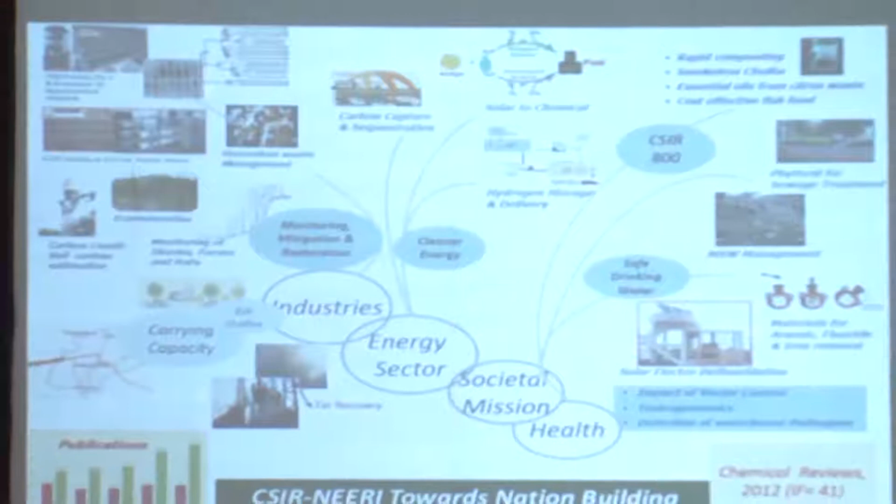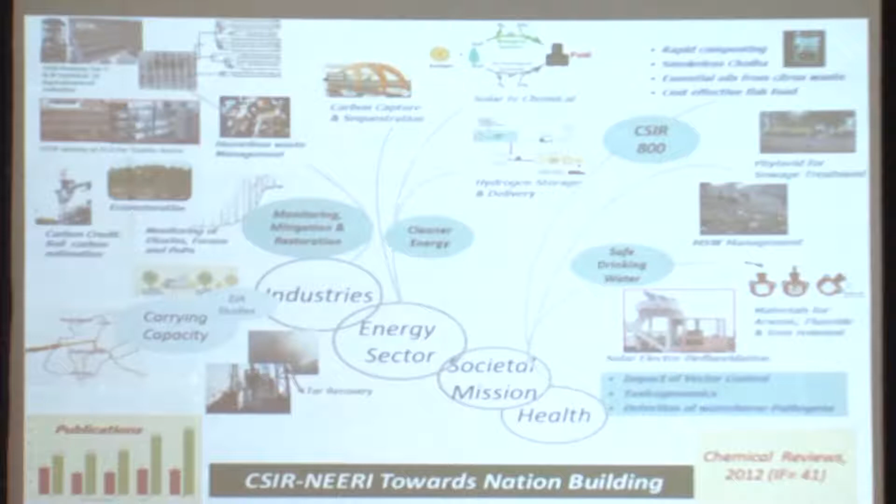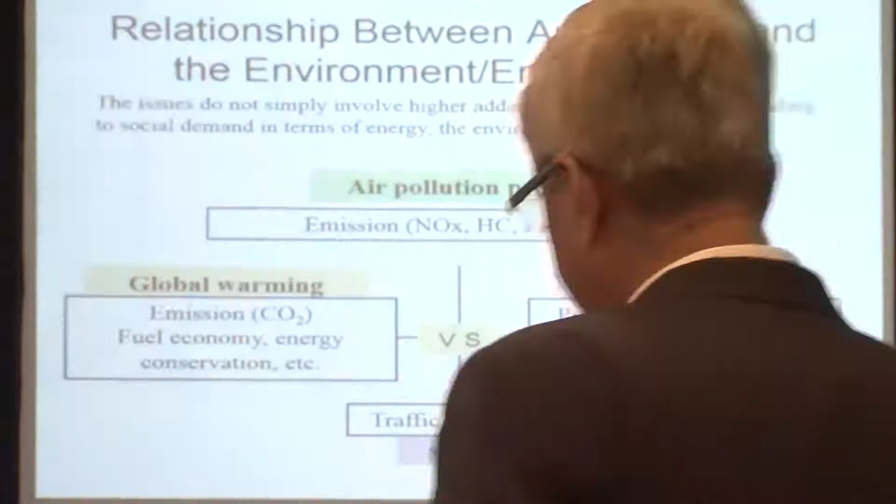As I said, we come from the Environmental Engineering and Management Research Institute, so we look at three issues as far as environment is concerned. One is the air pollution problem, which probably we talk too much about. Then comes global warming, CO2 emissions, and other environmental impacts.

Nowadays, we have a concept of life cycle assessment, so everything which is part of the automobile or related components should factor into waste disposal. And as you know, traffic accidents are also a big issue. So these are the overall relationships when we talk about the automobile.

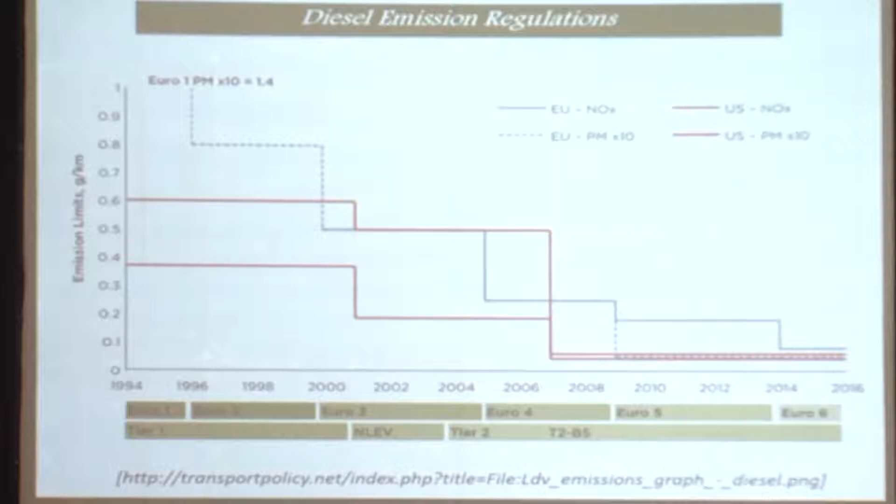I'm intentionally showing this because even after tightening so many emission norms, if you see the pollution scenario in our country, this is part of the CPCB 2011 report, which NEERI along with many other organizations was part of. The first graph shows Bangalore and the second is Delhi.

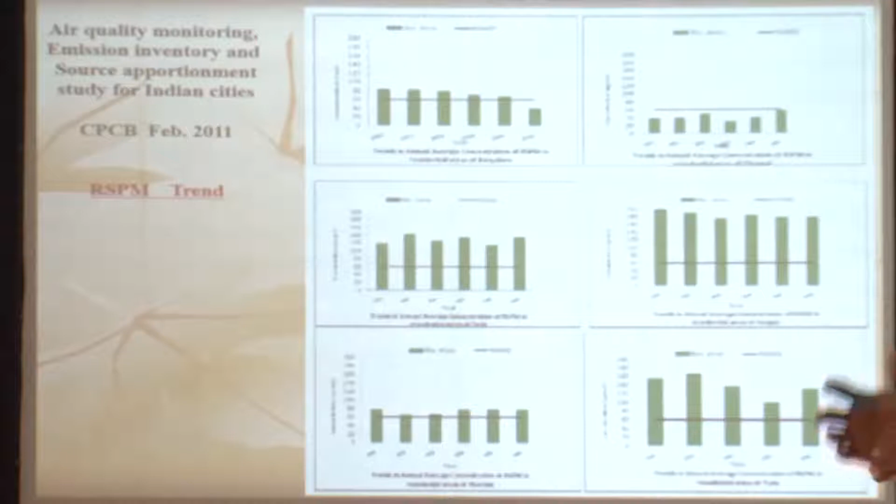That line is the emission, like the PM levels, RSPM level. So in most of the cities, we are exceeding the limit. Despite the fact that we have tightened the emission norms so badly, the present scenario is that PM levels are going up above the standards.

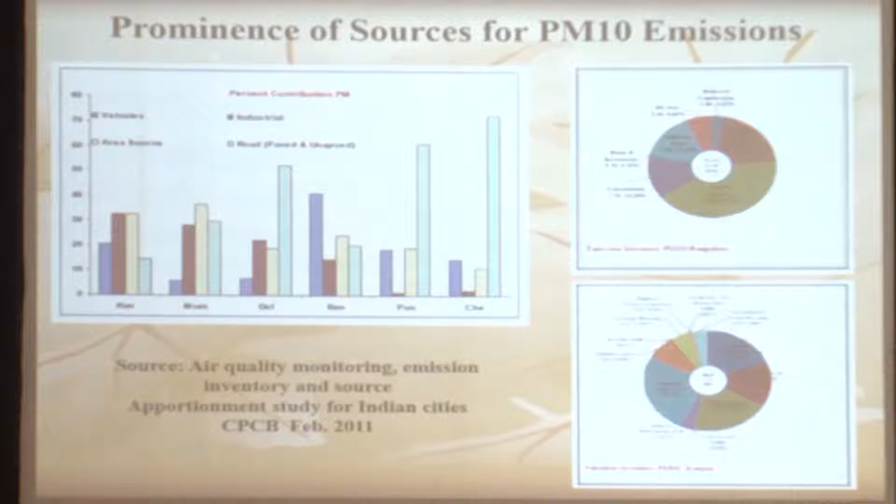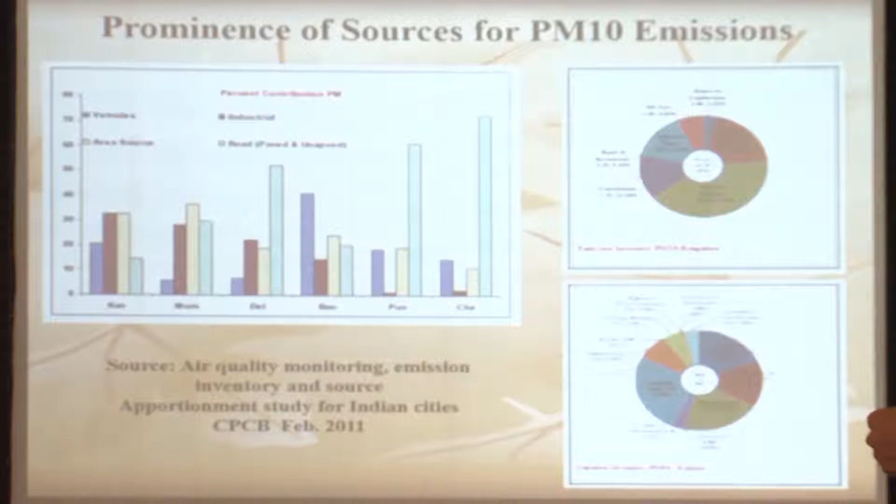If you see the source apportionment result of that particular study, which is now 5 years old, and new data is coming—I'm sure my friend Tarun will show some of that data—the source apportionment study really confirmed that in addition to road dust, which is one of the significant parts of PM emissions in India, diesel emissions are also significantly contributing. So two things are sure: diesel emissions are increasing, and the contribution of vehicles is also significant.

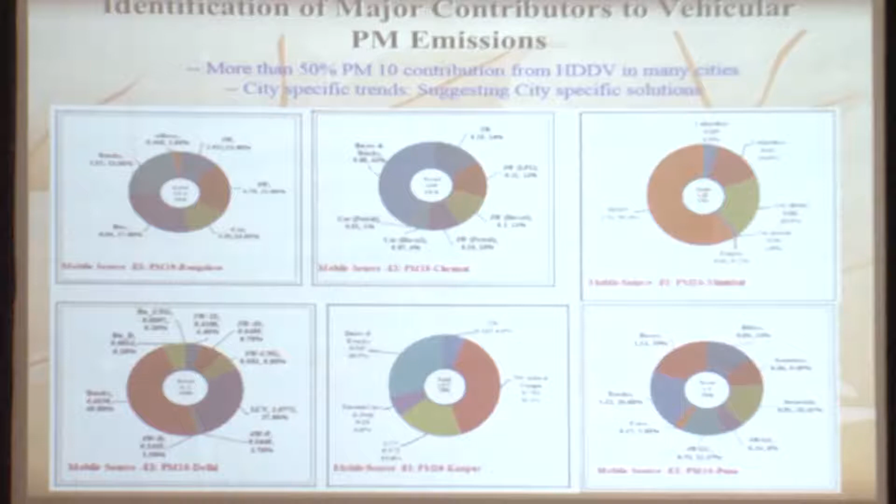If you narrow down to what kind of vehicle, this particular study suggests that around 50% of PM emissions are coming from heavy duty diesel vehicles. But that is a pretty city-specific trend. So heavy duty diesel vehicles contribute, but it's city specific—for example, in Bangalore it's probably more significant.

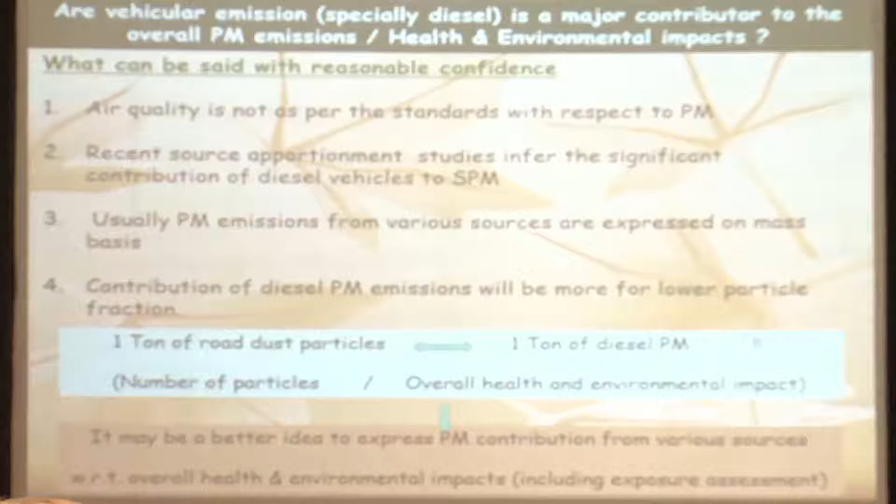I would go one step further—based on this study and all previous studies, and I try to project this wherever I find opportunity—that we are talking here in terms of the mass of particulate matter. But can we really compare 1 ton of road dust particle and 1 ton of diesel PM, as we do at NEERI and many other environmental engineering institutes?

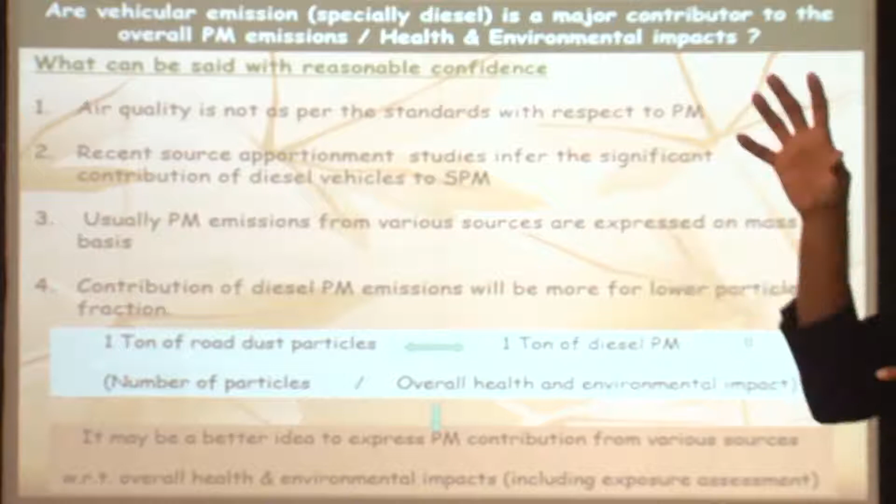Nowadays we talk not about emission-based targets, but health-based targets. So if you see the projection, and when you go to anybody like a minister or bureaucrat, they say the major issue is road dust, because the road dust contribution is pretty high.

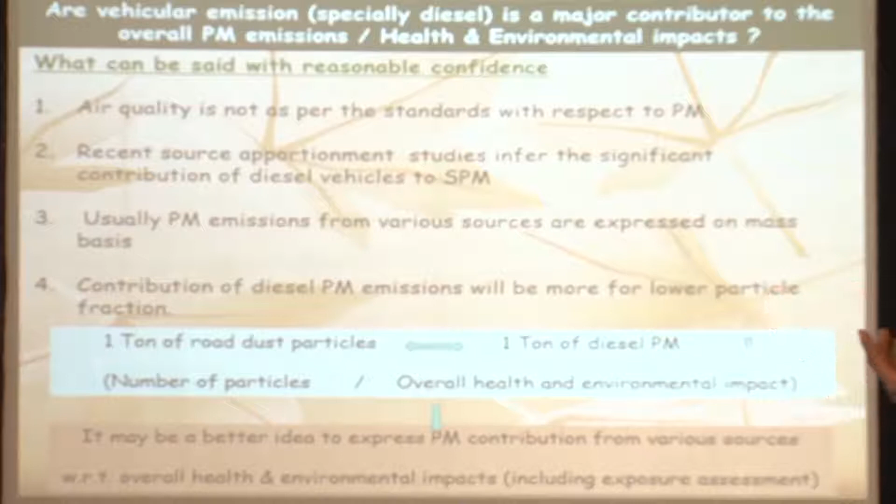But can you really compare the 1 ton of road dust with the health impact of 1 ton of diesel particulate emission? It's high time we should start projecting the overall health impact of diesel emissions. Sometimes its contribution in terms of mass or weight basis may be 10%, but the health issue could be quite up, in fact the diesel emissions quite up.

And there are beautiful posters I can show, we have seen this one. Oh, sorry. And where's the pointer? This one? Oh, I'll use only this.

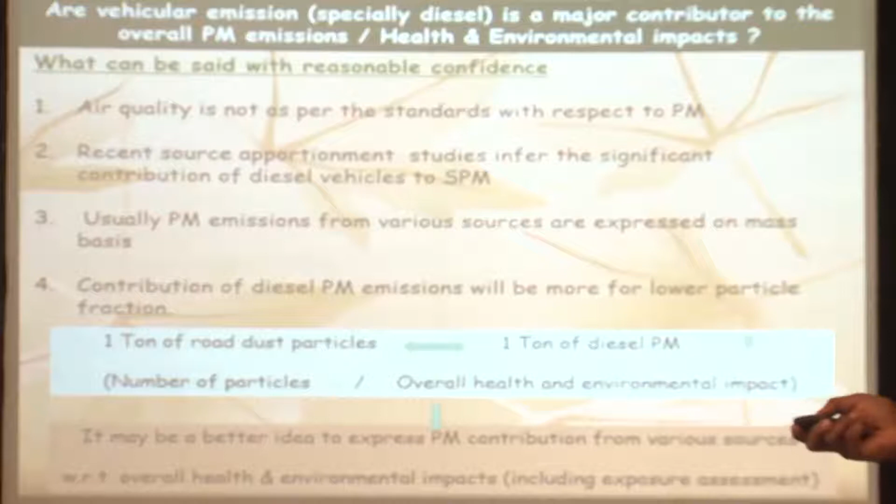Thank you so much. So this is one thing which led us to believe that in many cities the contribution of diesel particulates in terms of mass emissions is less, but if you see the health impacts, it will be much more severe.

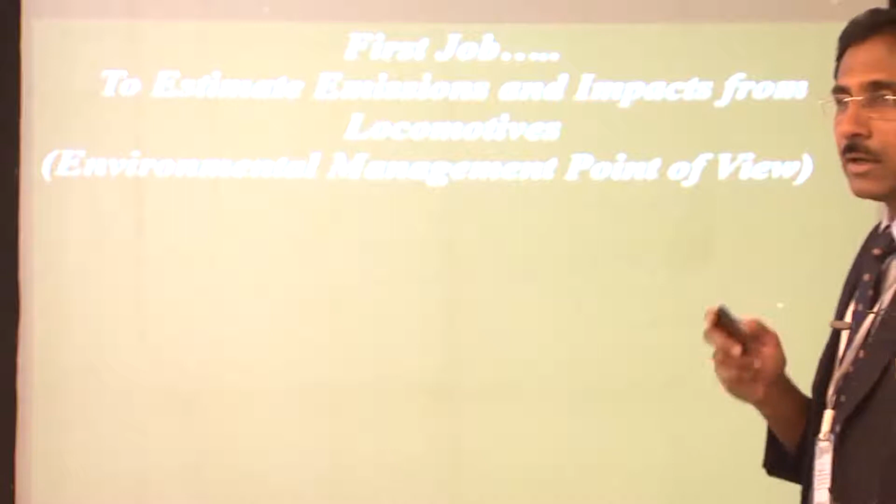So what is our first job as far as locomotive emissions in this country are concerned? To estimate emissions and impacts from locomotives. Professor Avinash Agarwal made a beautiful presentation during the last ECT showing they are already on the job. This is very much required from an environmental management point of view, because we are still a developing country where every rupee counts, and we cannot project one issue and hype about it, because we have more burning problems related to food, poverty and health issues.

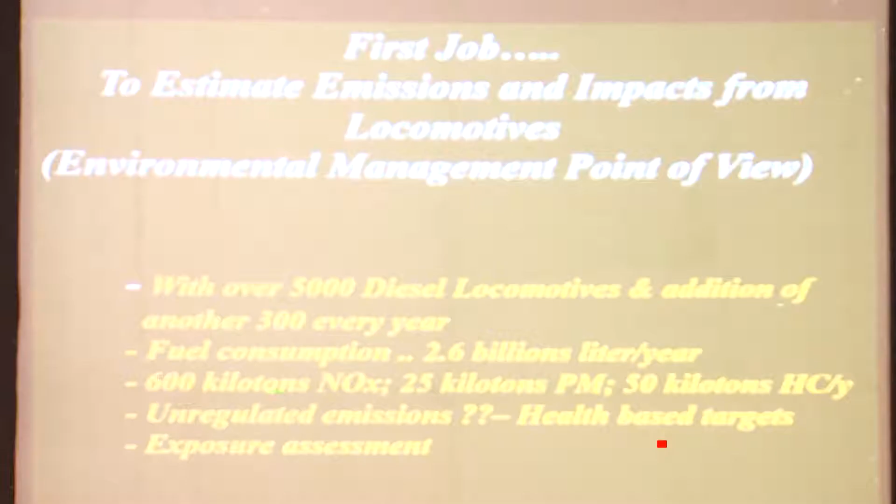With over 5,000 diesel locomotives, probably this number is less, it's about 6,000 plus, with an addition of another 300 every year. The fuel consumption is enormous, 2.6 billion per year. I had taken roughly 25 kilotons PM, and nowadays it's possible to estimate the social cost or impacts of this.

Let us see what are the strategies for vehicular emission control, because this is quite similar, and we should learn lessons from the vehicular emission control program, which has completed almost 20 years in this country.

So engine technology, I'm sure there were many good deliberations. Revision of emission norms, introduction of emission norms are rather on the cards. Adoption of vehicle pollution control technology, this is how we go. I've intentionally made it red because proper implementation has been a problem, and today even a problem.

But when it comes to the locomotive, we can have better control. As far as I&M is concerned, this country is probably suffering most because of the lack of inspection and maintenance. We can have better control when it comes to the locomotive.

Traffic planning and management is another issue, and the majority of emissions in the metro cities, or for that matter even in Lucknow, comes from this. This is probably no issue when it comes to the locomotive.

Improved fuel quality, so I was told that they are using commercial diesel, which is of decent quality now. Inspection and maintenance of emission control equipment, again we can have better control, because if I ask you what happened to the first catalytic converter fitted on the Indian car, nobody knows.

It is still there, maybe completely blocked, because the converter we removed in Nagpur, I found more than 50% of the converter should contribute more to the emissions, because we found the ceramic support partially damaged even. So this is the state.

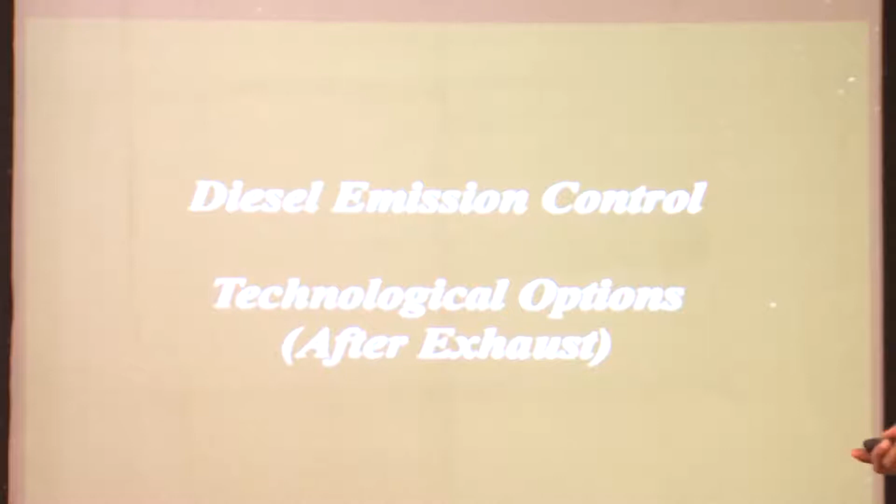Now I'll briefly introduce, because we have got an expert from Sud-Chemie, and briefly this was discussed. This is the scenario of diesel emissions and what are the technological options. I'll restrict to the after-exhaust treatment, because engine is neither my area and it has already been discussed very much.

This is how the diesel particulate forms, and during its cooling process two things happen, one good and one bad. The better part is it gets agglomerated and the size increases so that its penetration or inhalation is restricted. But the bad part is most of the hydrocarbon starts getting adsorbed on that, which actually offers the carcinogenicity or the more harmful health impacts.

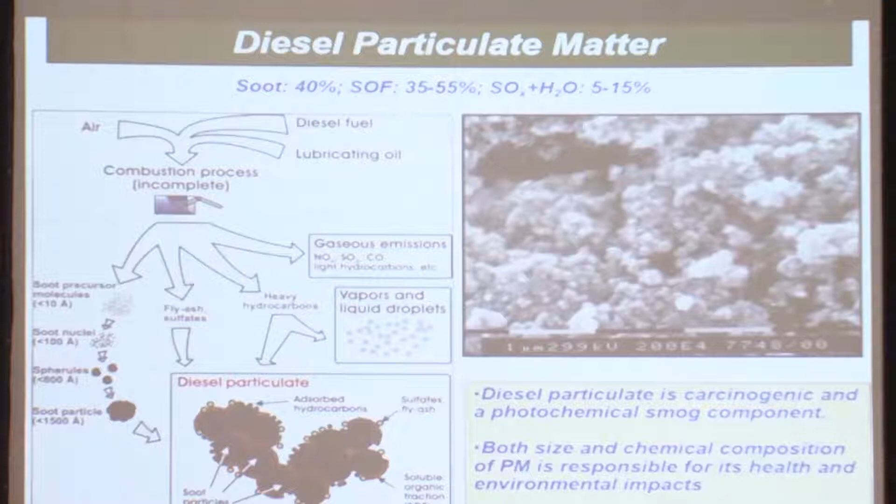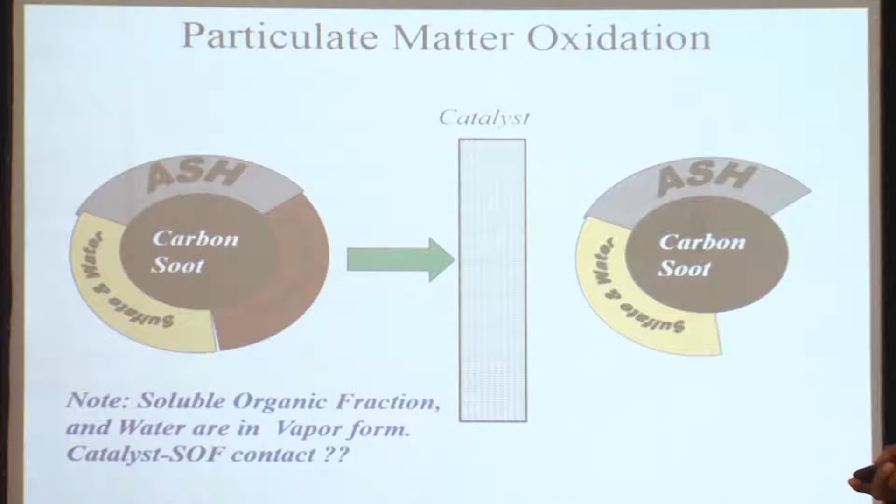Three options are quite popular as far as vehicles are concerned. The very first is a diesel oxidation catalyst, where we treat what is known as the soluble organic fraction. It's quite similar to the petrol-based catalytic converter, and we can expect oxidation of hydrocarbons associated with the soot particles or with the particulate matter. Sometimes the exothermic heat generated out of this oxidation may also contribute to some extent to oxidation of carbon. This device is quite simple, and this is the typical particulate matter.

Here you have coated the catalyst, and what we are losing is a soluble organic fraction. If you have more fraction, then the efficiency is more.

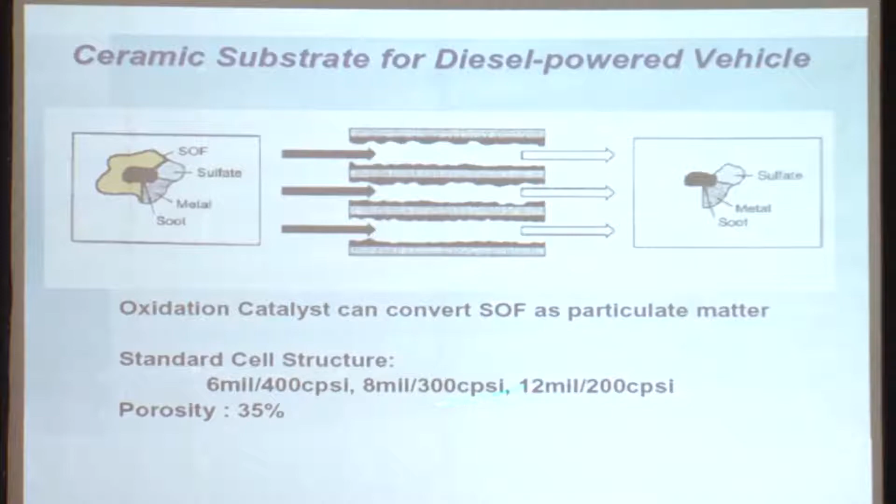Typically, DOC gives 20 to 30% efficiency, a moderate efficiency, but it requires relatively less maintenance. Most vehicles in India are using DOCs and not DPF.

The second device, which is most efficient, is the diesel particulate filter. Now they say for Euro 5, we may need DPF. For filtering particles, obviously a filter is the most efficient device, and commercial filters are available with very high efficiency.

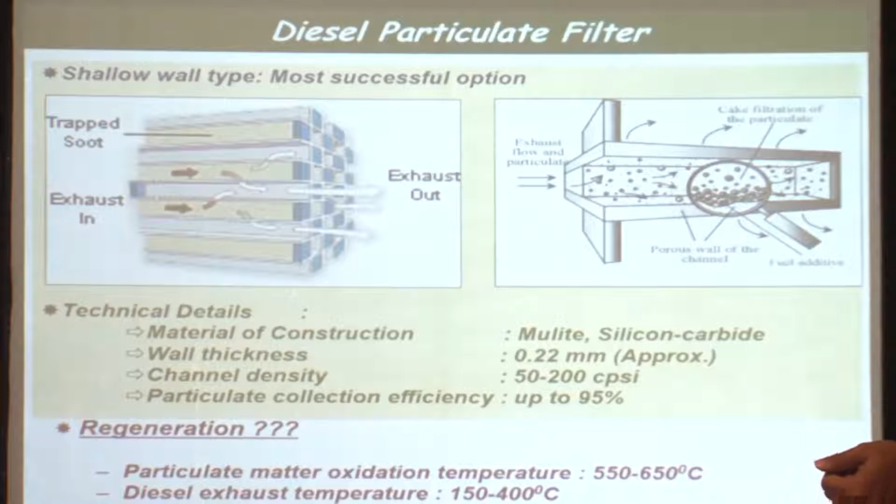But the issue is, after it gets clogged with soot, how to regenerate it. Because it burns at about 550 to 650 degrees Celsius, while diesel, being a lean burn engine, has a quite low exhaust temperature. So regeneration of DPF is the major challenge, and there are two major approaches.

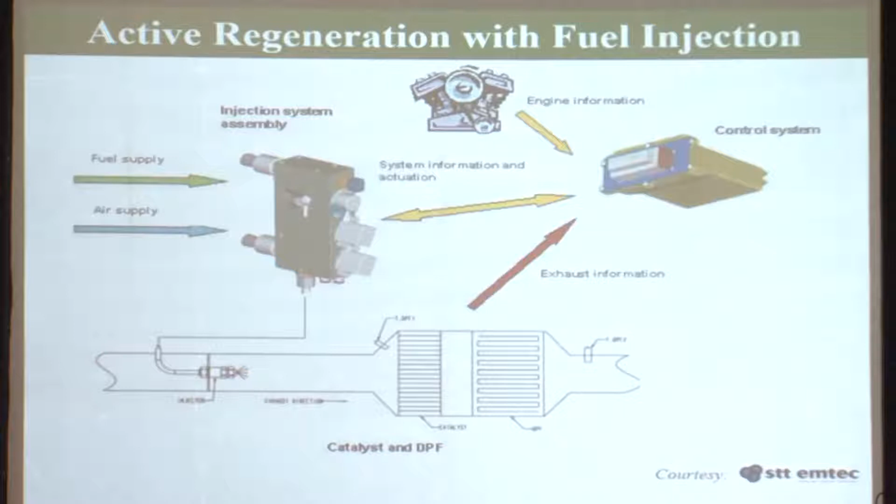One is active regeneration with fuel injection. This may be a possibility with the locomotive also, because it's a huge engine, and there's some scope for this, but certainly there will be a fuel penalty which we should take care of.

Then second is catalyst assisted, or CRT, from Johnson Matthey, discussed in the last session. There is a DOC whose job is to oxidize NO into NO2, and this NO2 then reacts with the trapped particles to regenerate it. These are most commonly used for vehicles.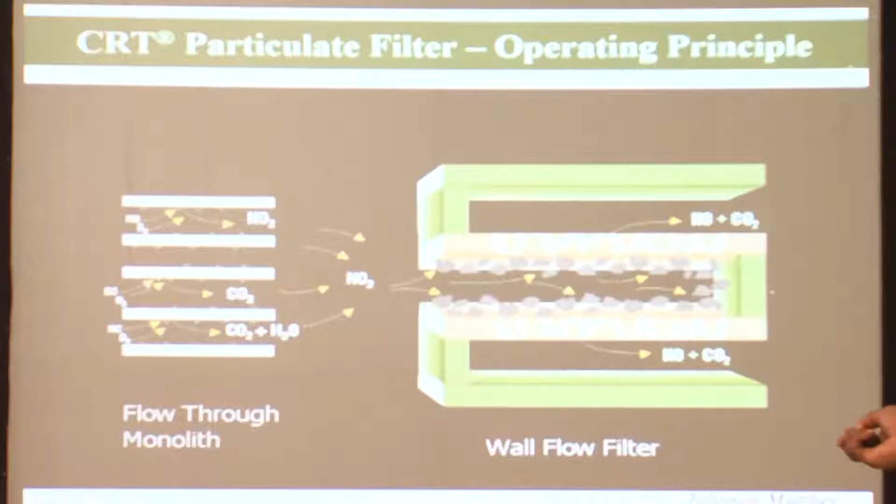In between come the partial flow filters, because DOC generally doesn't have a back pressure, and the DPF has a high back pressure. This compensates for both, and there's been really good development during the last decade, achieving moderate to high efficiency. So we have 3 devices, 3 different kinds of efficiency, 3 different kinds of maintenance.

This partial filter technology, again, I have taken from Johnson Matthey. So this is the background: we have diesel emissions from vehicles which are significant, and we have certain estimates about what kind of emissions are there from locomotives.

There are 3 options which we tried on vehicles. I certainly don't have any experience on locomotives. So what are the R&D opportunities? Where do we stand, or where do we work?

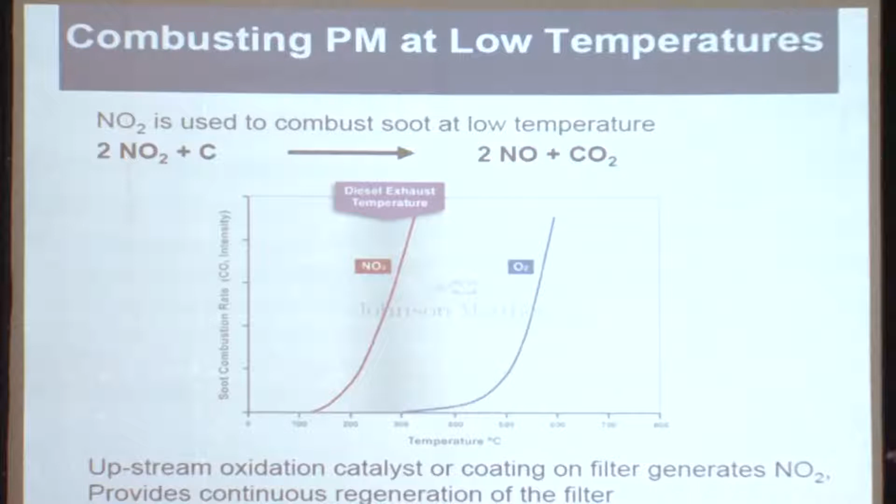This is a typical reaction for soot oxidation. NO2 plus carbon has a favorable delta G, what we call in chemistry or thermodynamics, and this reaction can happen at as low as 200 or 250 degrees Celsius, although 300 or 350 is more desired. But dependency on NOx is one issue, and second, most of these reactions are catalyzed by noble metals.

So the first driving force: can we catalyze a reaction without NOx? Can we have a reaction of soot plus oxygen that regenerates? And the second driving force is that it's all noble metals.

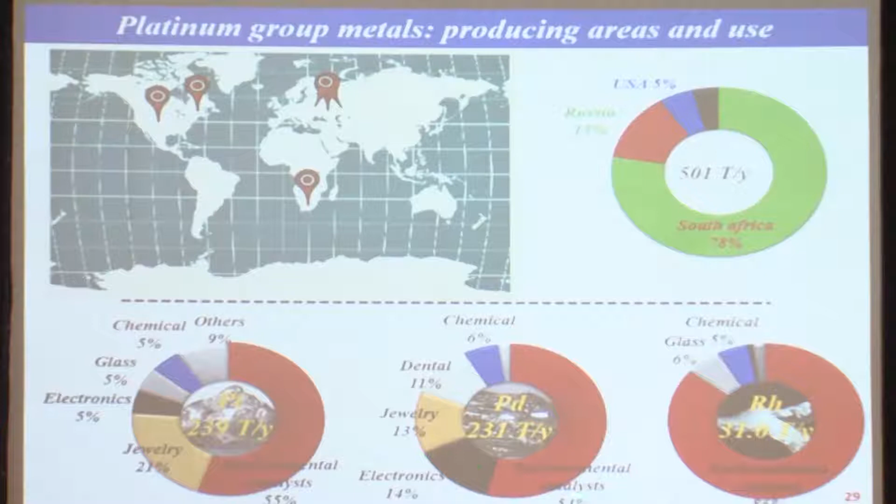This is the consumption: about 55% of platinum, again 55% of palladium, and 90% of rhodium are being consumed only in environmental catalysts. So there is a good possibility to explore non-noble metal based catalysts, but the application is very, very tough. We have been working on this for more than a decade.

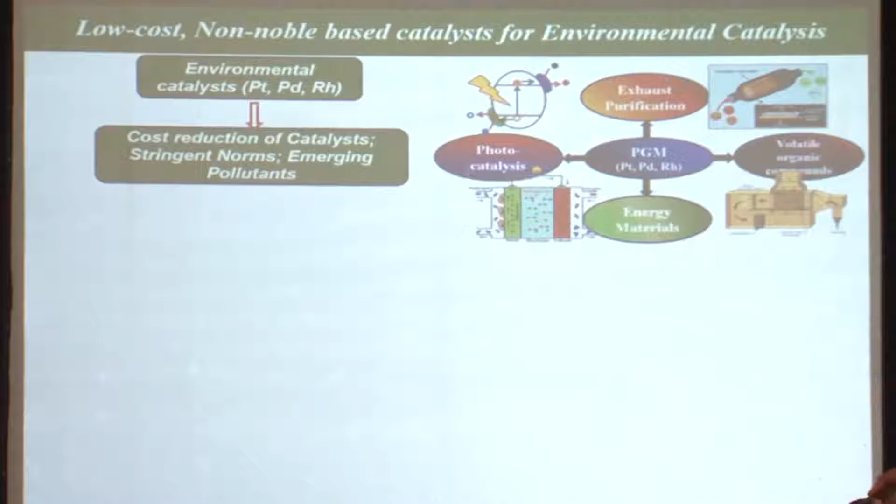So we have 2 approaches. One is to reduce the amount of noble metal, but people have already hit the limit, and once you change the particle size, the chemistry itself changes. But one of my postdocs wants to work on this.

And second, the possibility of non-noble metal-based catalysts. The only driving force is that we're now getting a cleaner fuel. The stability is not so good, but with the introduction of ultra-low sulfur diesel and so on, this is how we are working.

So we are starting with milder applications like VOCs and other applications, not really auto exhaust. But this is one approach where we are working.

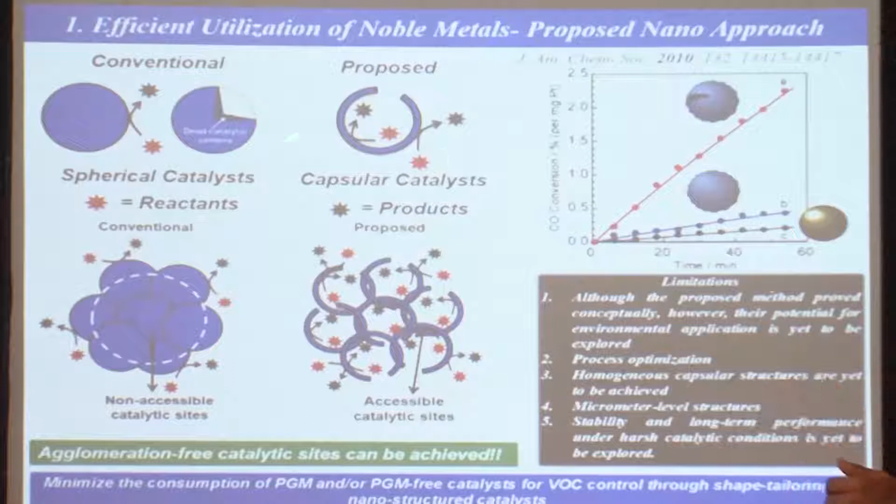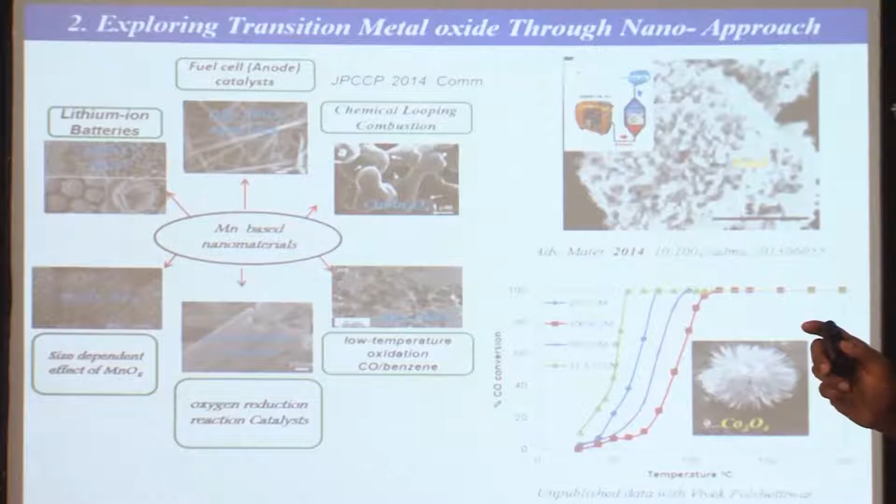The second approach is we are exploring quite a few catalysts which either don't contain or contain a very small amount of noble metal, with the entire emphasis on reducing the cost of materials. I'm not going to go into the details for two reasons: it's not a chemistry-based audience, and second, time constraints.

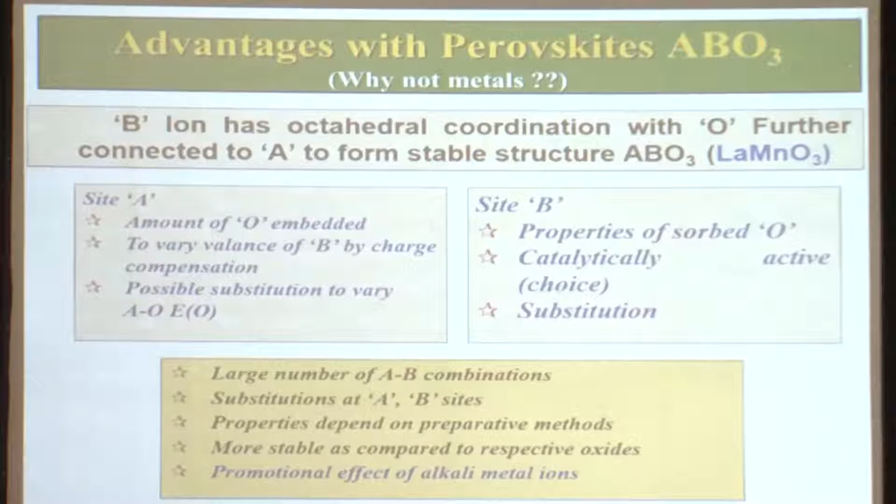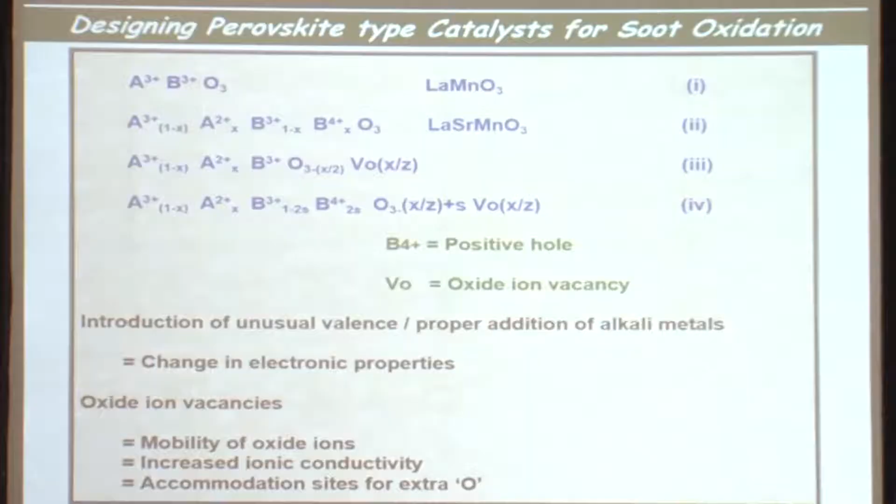This is one class of compounds we have been exploring along with a couple of our collaborators, where we exploit the knowledge of chemistry to design different catalysts. These are some of the catalyst compositions we recently explored and found interesting for diesel soot oxidation.

When it comes to the laboratory-based catalyst evaluation system, we use two kinds of systems. One is a thermogravimetric measurement, where you put the soot and it gasifies and you get the weight loss. Next you mix the soot with the catalyst and check the temperature.

But probably the more realistic evaluations you can do with this kind of setup, where you create a simulated automobile exhaust composition, and then you have a reactor where you can manipulate the temperature, and a gas chromatograph and NOx analyzer give a fairly good control over what is happening at what temperature. So we like this kind of assembly very much, and this is the kind of data we get.

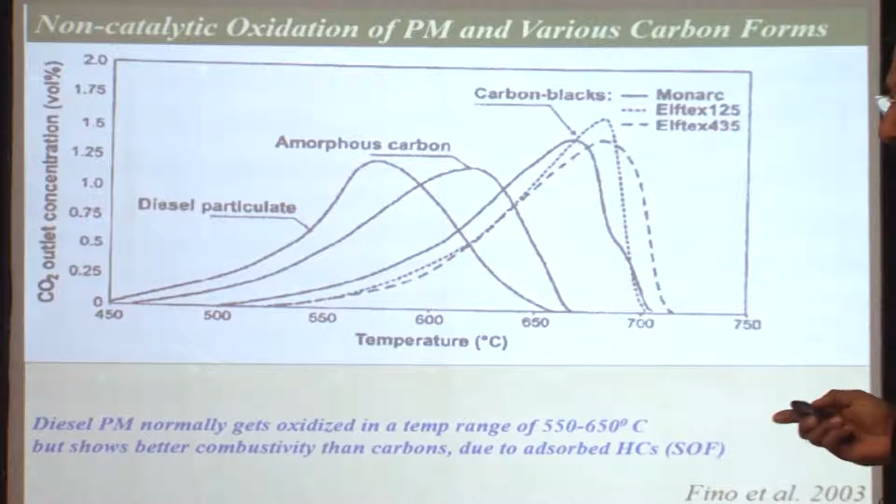For example, if you burn the soot, it will give you CO2 at a certain temperature. With catalyst, this should reduce, but you can see with bare soot it also varies a lot. These are reports from the academic world showing that it depends on the soot composition. After catalyst intervention, you can get a peak at around 350 or 400 degrees Celsius instead of say 600 degrees Celsius. That gives us some idea about the catalytic activity.

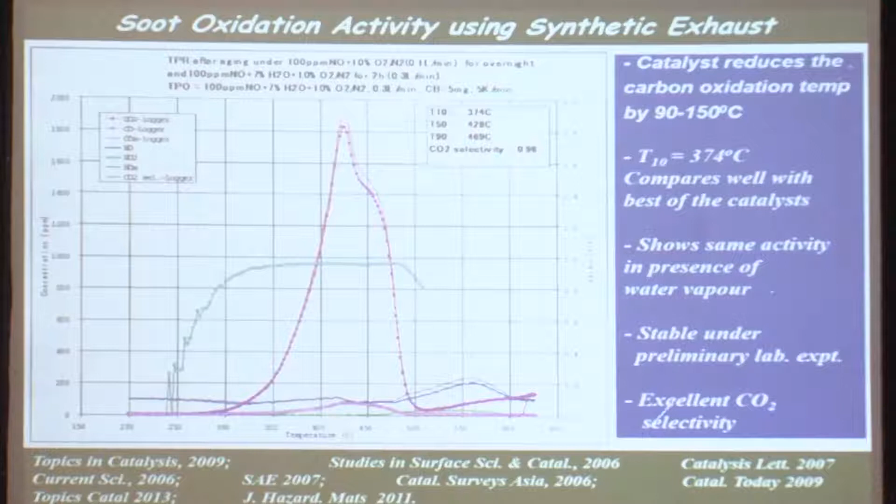So normally the academic world uses these kinds of methods, and then the next job for us is to go for the full scale prototype, which is fairly complicated. I collaborate with a Japanese university, where they have a bench scale facility with a 200 cc prototype and a diesel engine, so you can have an exhaust flow and much better control over things compared to the lab setup.

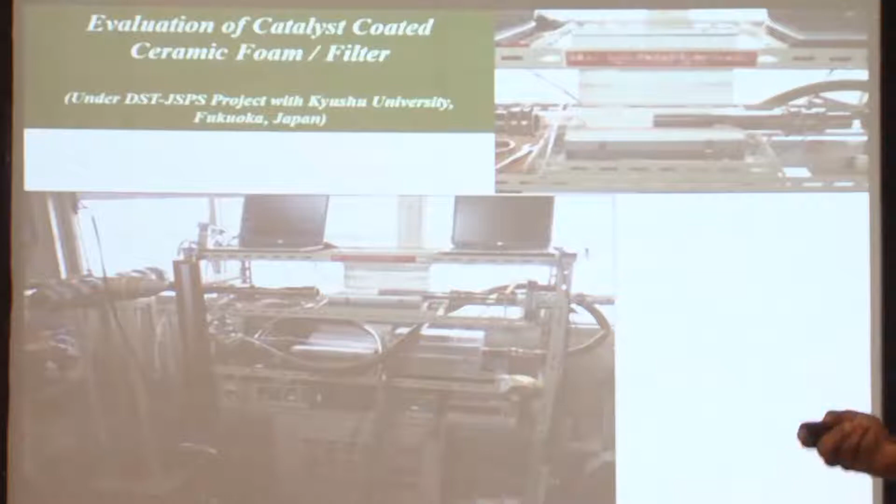The last stage, I would say, for R&D is the evaluation of the prototype. Here we collaborate extensively with Professor Avinash Agarwal and Professor Tarun Gupta at IIT Kanpur. It's an amazing facility they have. Recently our students prepared some prototypes using purely non-noble metal-based compounds.

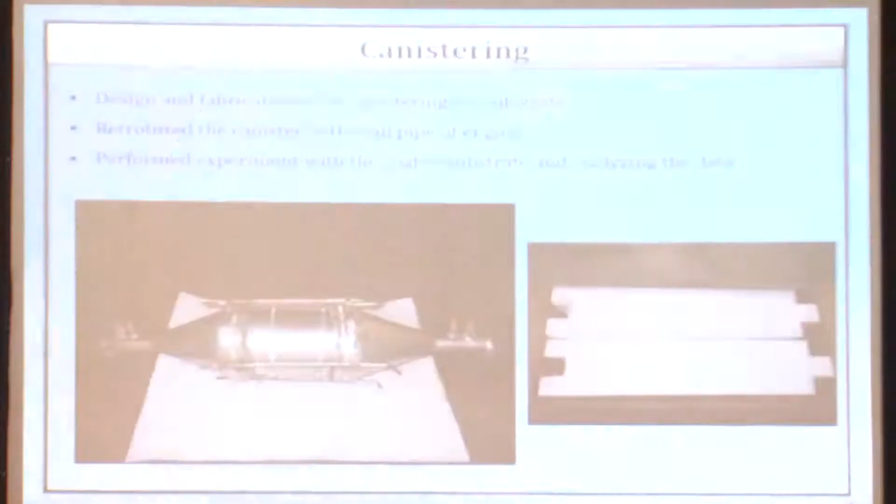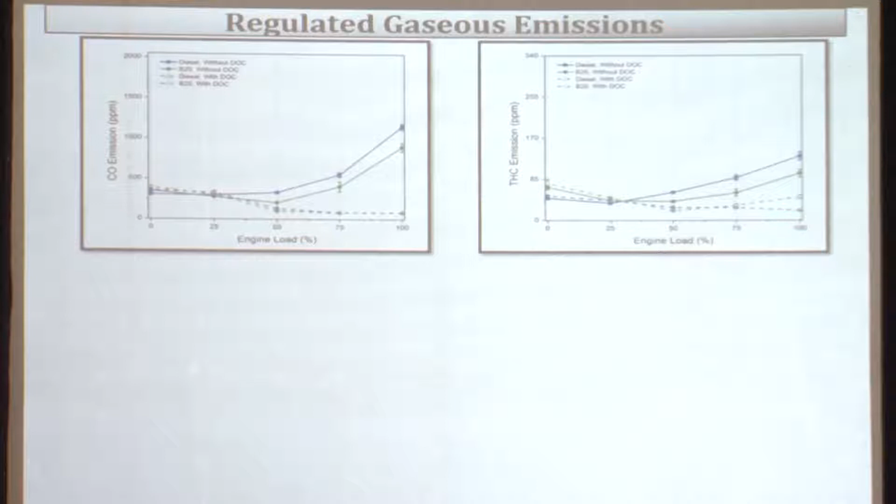This is the data. There were two interests: my interest was to evaluate the catalyst, while Professor Avinash's interest was to use the B20 or biodiesel blend. We found that diesel with the DOC and B20 with DOC, as far as CO emissions and THC emissions are concerned, showed significant reduction. The temperature was also fairly acceptable, 200 degrees Celsius for CO in both cases.

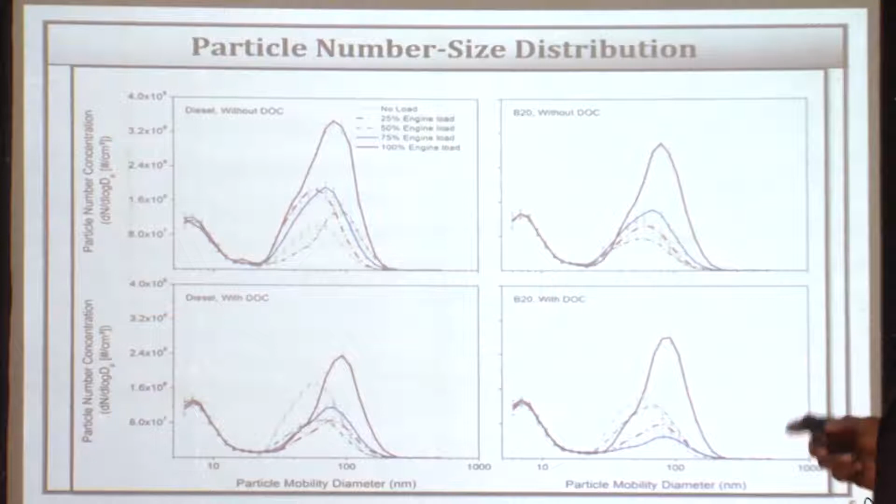So for CO and HC we got decent data, and some reduction in particles too. On the particle number side, they have good facilities, so this is the particle number size distribution with different load conditions. I would say a DOC is anyway not expected to give very high efficiency, so in this particular case we could get, in some cases, 20 to 30% reduction in PM as well. There's quite a bit of data, but I have to move on.

I'm showing this particularly because as far as I see, there are 6,000 locomotive engines, and we are adding just 300 every year which are supposed to be cleaner than the engines we already have in use. So the majority of emissions come from these old or dirty engines. We need to seriously think about that, and a few studies worldwide show that retrofitment could be an option. We have done some retrofitment studies with respect to city buses, the old city buses, and probably that could be useful. I'm not very sure. As far as city buses are concerned, they are also one of the main targets because the city bus roams around inside the city, and its impact is more than intercity buses.

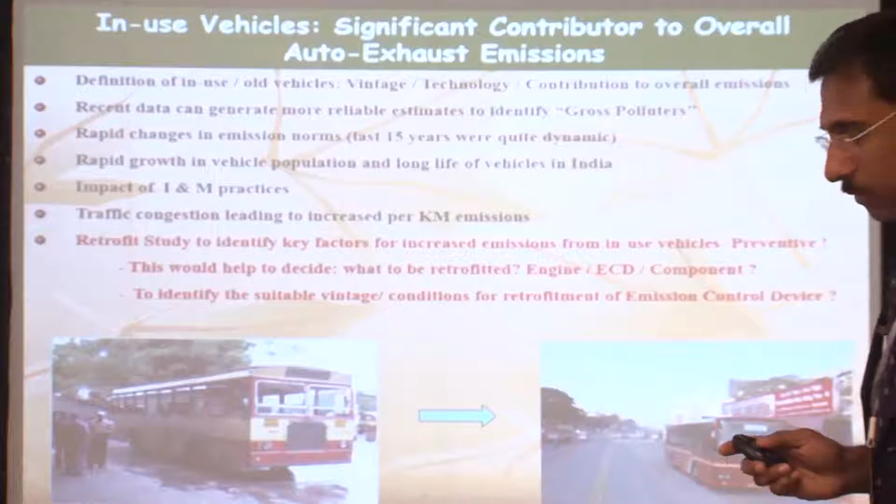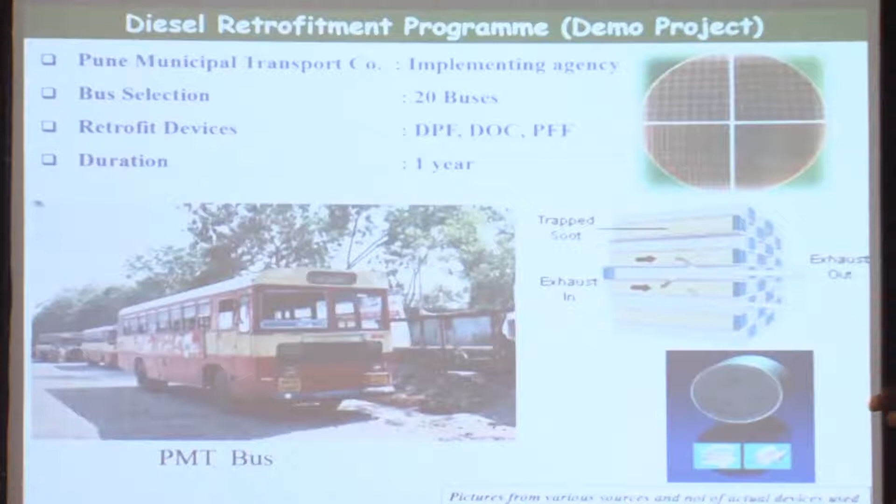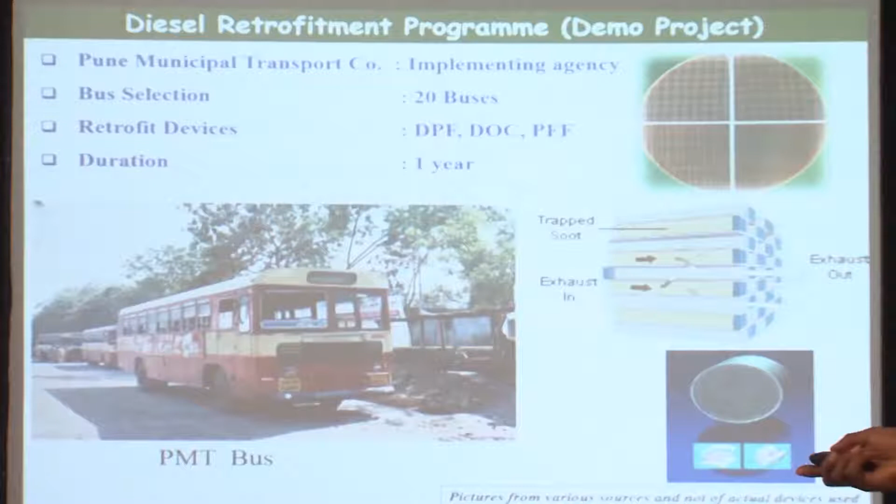There was a US EPA sponsored project in Pune where we attempted this, with three devices: DPF, DOC, and a partial flow filter, what I showed you. This was a typical bus. We selected 20 buses, and to some extent we were forced to try DPF even though there was no experience whatsoever, even on the new buses at that time.

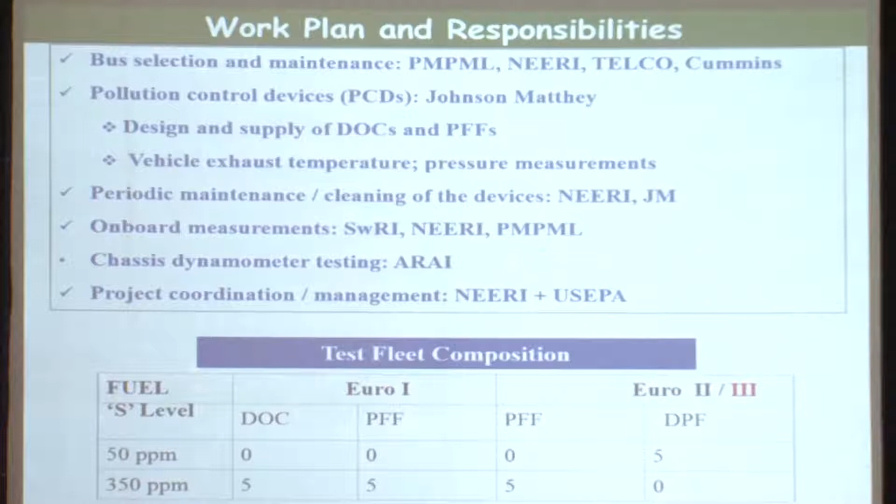This was our matrix. Fortunately, quite a few institutions were involved. Our technical partners were Johnson Matthey and Southwest Research Institute of USA. PMPML is the bus agency, in fact, and ARAI was responsible for other things like testing.

One issue we faced: the time that you fix a device and something happens while the bus is running, then there is big public unrest. So you need to take care of those things. So what we have done, we have put a sort of CRTDM sensor. It gives a signal to the driver, and then we made a kind of bypass. If the bus stops, what to do? We have to accommodate maybe 100 passengers in a bus. So you can bypass automatically.

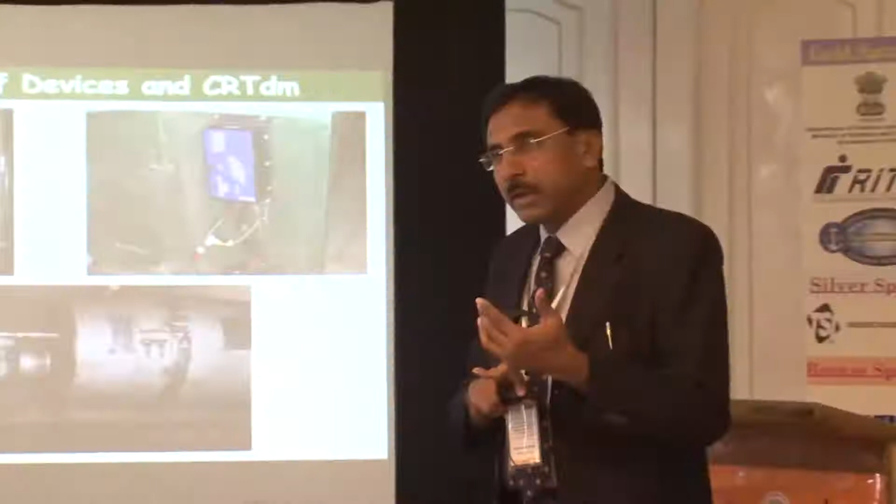So these kinds of preventions you have to take, and before that goes an enormous amount of preparation, to start with the cleaning of the fuel tank and the maintenance of buses. To tell you, the fuel tank was containing not less than 80 or 100 kg of sludge. That was the kind of sludge we found in the fuel tank. So please be careful before you start blaming the technology provider like Johnson Matthey that your device is not working. There could be tens or maybe hundreds of other reasons. It's a tough job, we found.

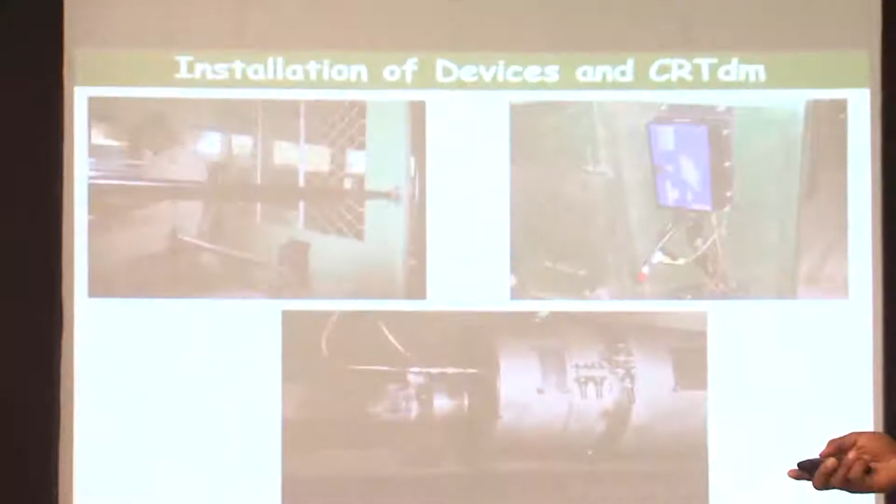And the buses that were given to us were maintained, I would say, in terms of fuel efficiency, because that is the interest of the corporation. But in terms of emissions, it was hard. We used to take periodic emissions, and one very interesting exercise we did with SWRI was to get on-road experience.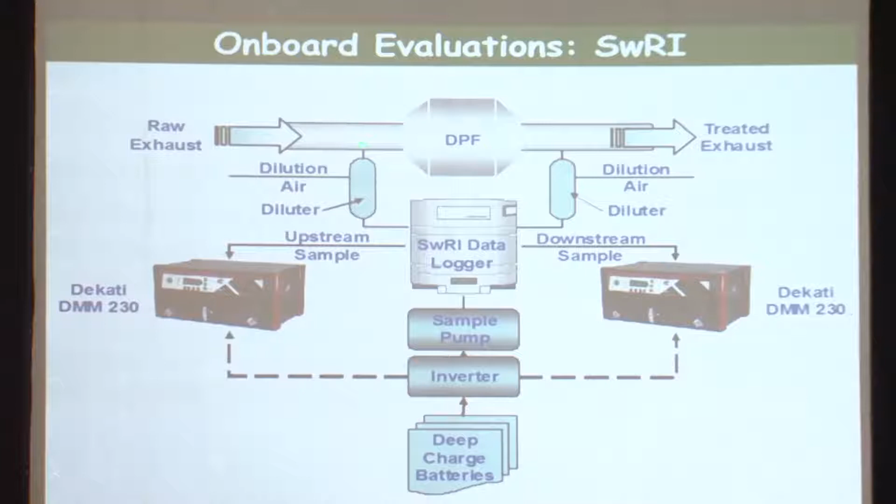There has been a lot of good or bad news we must have heard during the last couple of months, in fact, from very leading automobile manufacturers about cycle beating and other things, and people are calling it a huge scam. And we had some experience that we were not getting that. SWRI helped us do some onboard trials. For that, we hired two PM analyzers, and we fixed one analyzer before the device and one after the device. And we did a lot of complicated preparation.

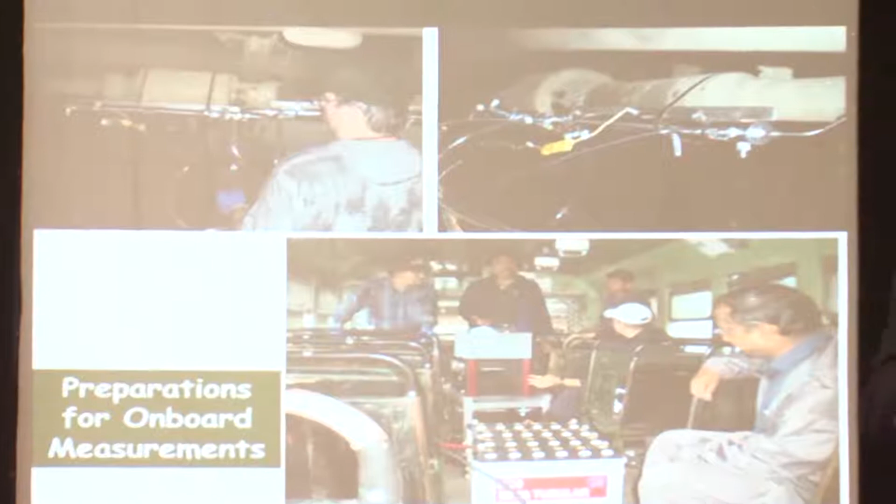So you have a bus, and inside the bus you can mount all the equipment. You can put some sandbags to simulate the passengers, and then you can take the emissions right from before the DPF and after the DPF, and you run the bus. We followed one typical pattern of a city bus, typical speed and everything, and that gave us some interesting data with respect to the exhaust temperature, the emissions, and other problems you might face.

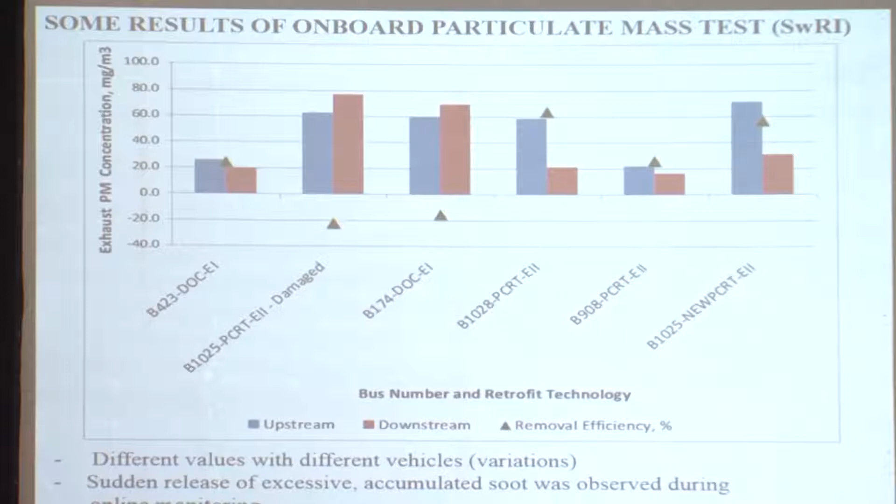The efficiency was ranging in a very, very wide range, I would say, sometimes plus 60 or plus 70 to even minus 20, which could be because of blow-by, that some emissions were trapped and then there was a blow-by. Exhaust temperature in general we found was very, very low. That was the major challenge, in fact, because the city bus can hardly pick up any speed. But I don't see that problem in the locomotive, so there are going to be some advantages.

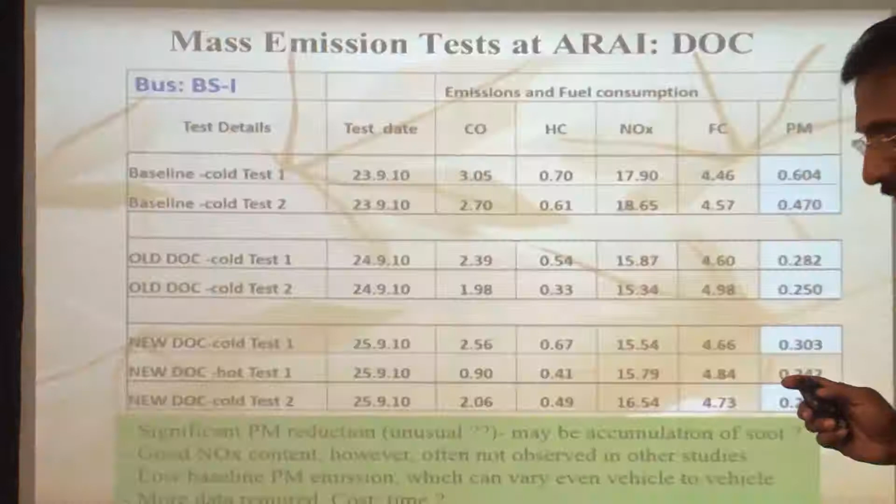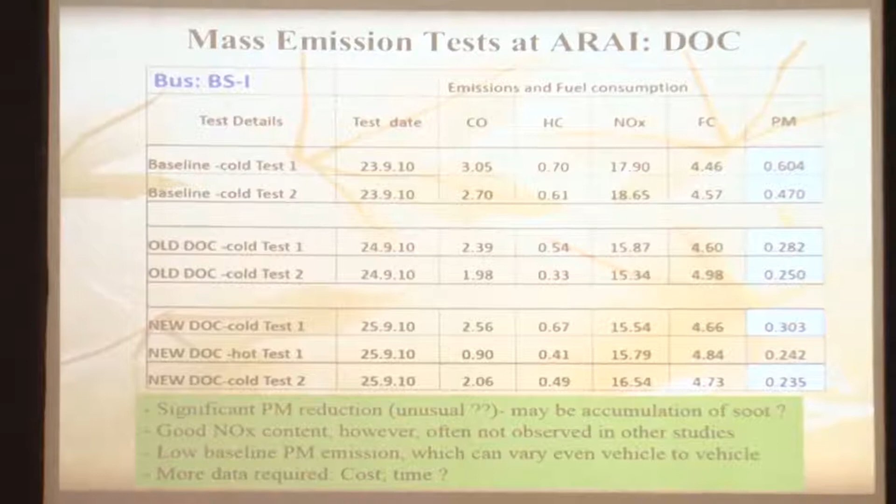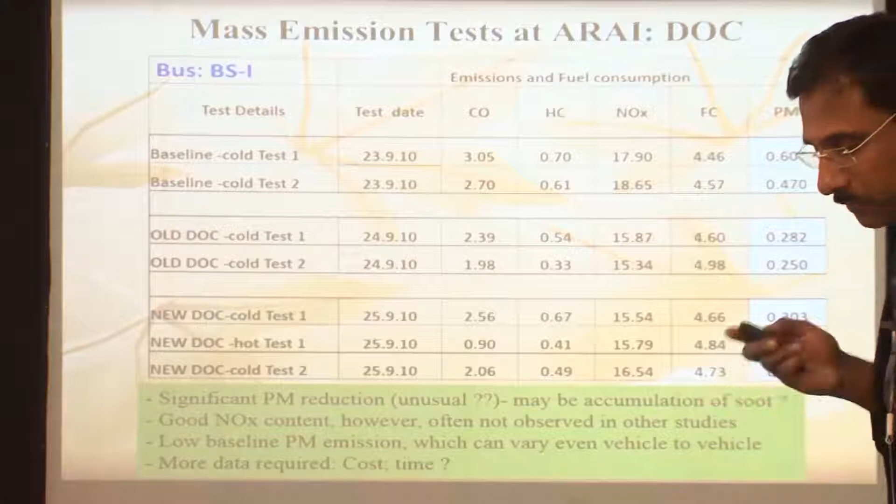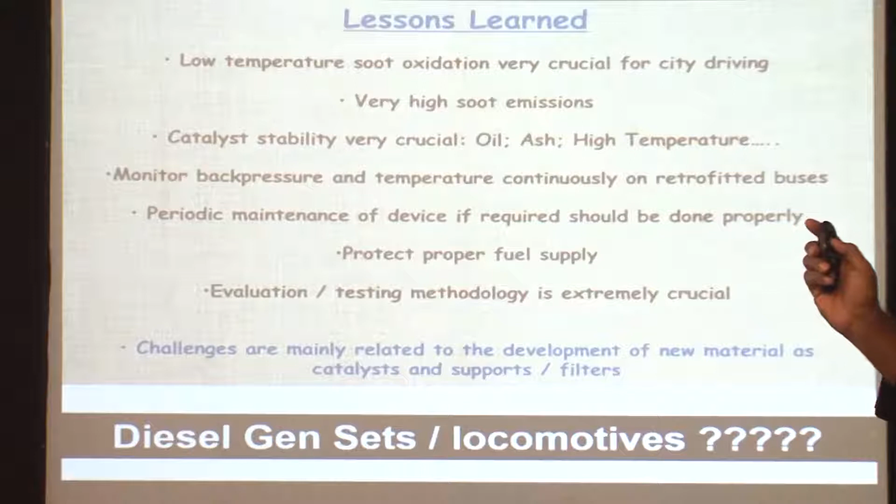So I would move to my final slides. This is the experience we have, but if you compare this experience with the locomotives, what I understand is that there could be some advantages: they are limited in number, we call it 7,000, while Delhi has more than 9 million vehicles. So controlling 7,000 is not a big deal. Better inspection and maintenance, because technical support is well in place. Engine vibration I am not aware of, but the track-related vibrations are not much as compared to the buses.

Something between mobile and stationary sources. Whenever some problem comes to us, we love the stationary sources, and we don't like the mobile sources because they are plenty in number and there is no control. That's why I personally feel that a diesel genset is a better option than the diesel vehicle, because there are hundreds of issues. User intervention is minimum, skilled user.

In Nagpur, I don't want to name the company, but a two-wheeler, very recognized multinational company. When you send your two-wheeler for regular checkup or servicing, they offer you some kind of cleaning or putting some liquid on the catalytic converter. And without knowing this background, they were forcing me to go for that thing.

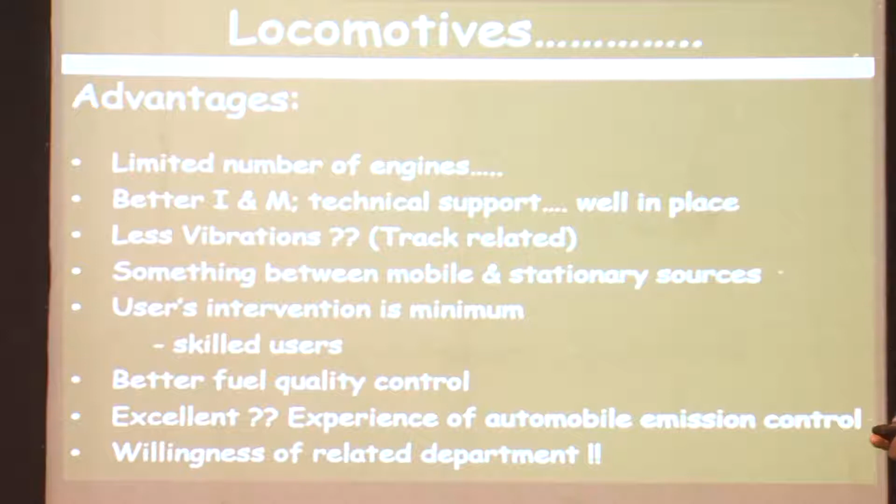So in this particular case, probably we'll have better control, better fuel quality control, and we have a lot of experience. I put question marks on excellent because initially we have learned quite a few things, mistakes I would consider, and we should not repeat those. And there is already a willingness.

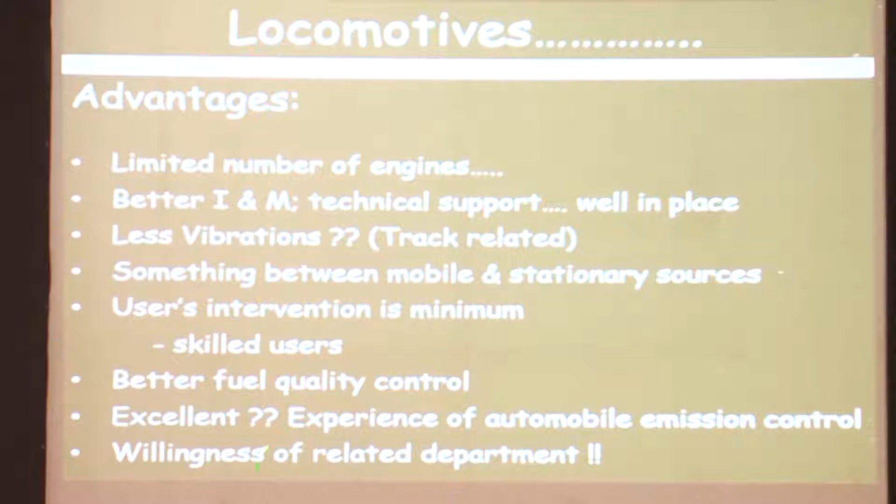What could be the challenges with respect to the locomotives? The engine-out emissions and emission characteristics need to be known, and RDSO is working hard with Professor Avinash's lab, in fact. Soot-NOx ratio, the exhaust temperature, exhaust volume, which I am sure we will soon hear from an expert. Space constraint, I can imagine. Limited experience worldwide; SWRI has some experience, as we discussed.

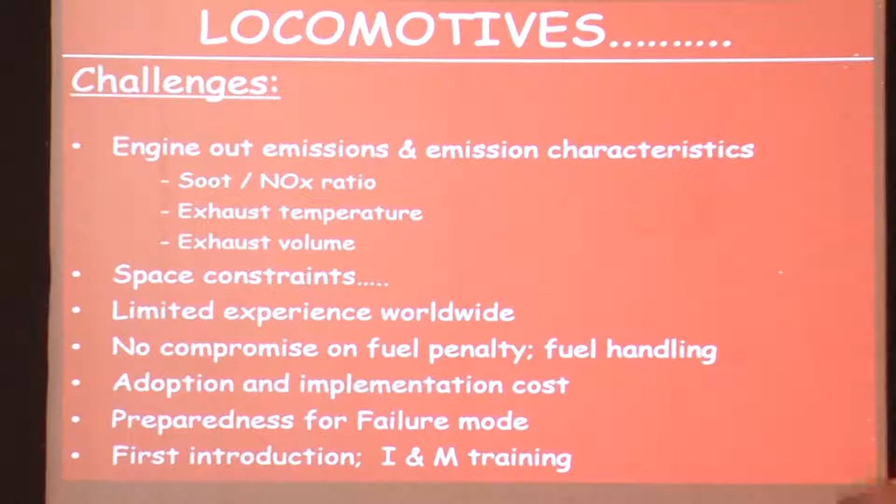No compromise on fuel penalty or fuel handling, especially when you talk about DPF regeneration, there's often a penalty. Adoption and implementation cost, and preparedness for the failure mode, as I told you, but all this can be taken care of. So there are pluses and minuses, but if you go by the overall scenario, diesel PM emission is one of the major challenges in this country. So we have to start from there, we need to do something with the diesel emissions. Locomotives can have a significant contribution and are also an attractive option for emission control.

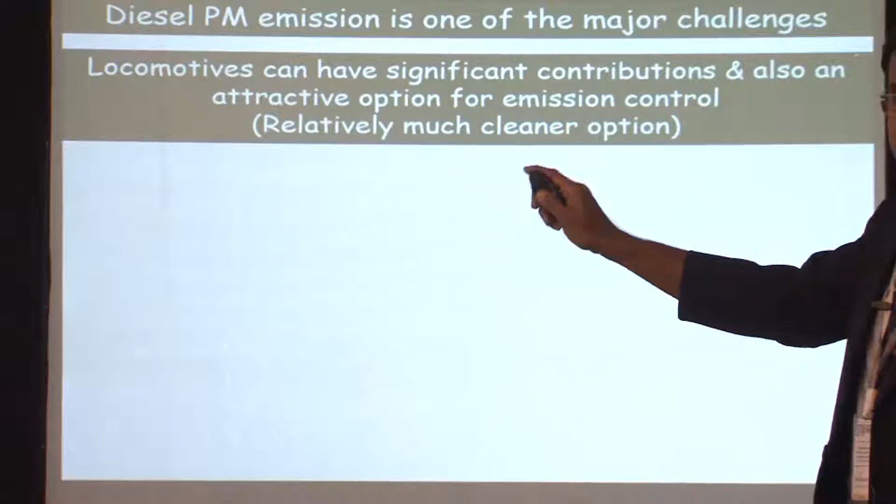As I mentioned, nowadays people don't talk about the emissions, let it be water or exhaust. They talk about health-based targets. You can reduce the emissions, but are you getting some benefits out of it? So let's talk health-based. If there is a water reservoir which contains fluoride, but nobody is using it, we should not touch it. There's no need to invest money on that. So we can have health-based targets.

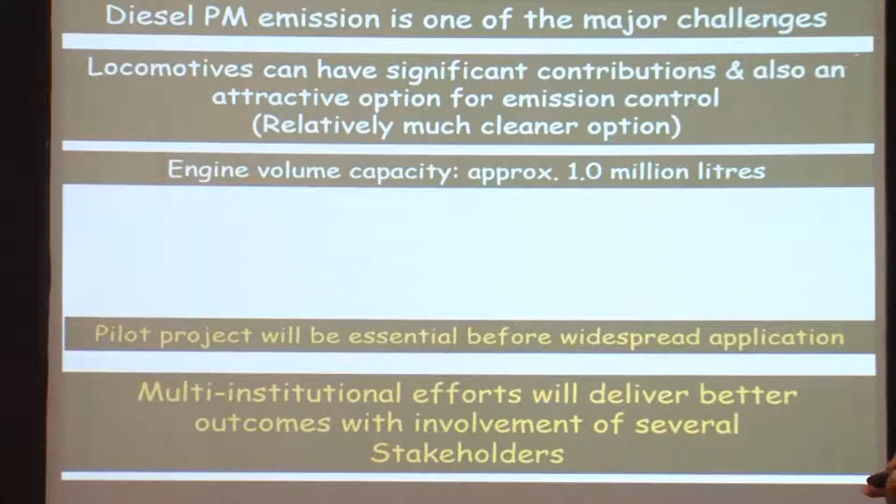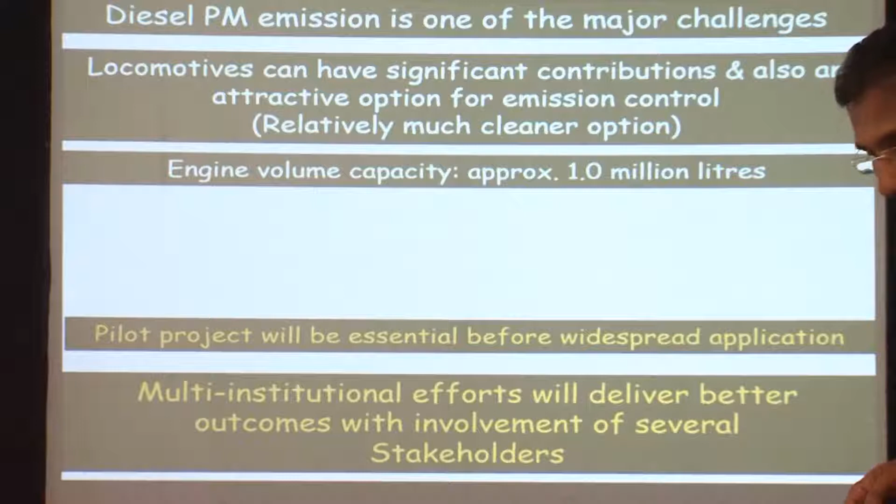So locomotives can be a significant contributor. Engine volume capacity comes to roughly 1 million liters. I was just comparing with the vehicles, and it's not really very high. But a pilot project will be essential before widespread application, and there's a good possibility of a pilot project, I would say. And again, multi-institutional efforts will deliver better outcomes, and we need the involvement of all the stakeholders, taking advantage of a lot of experience.